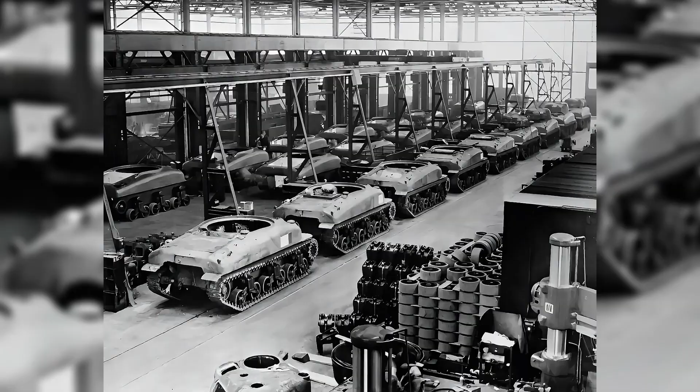What unfolded on August 17th, 1943, high above Germany? And why did it reshape the fate of World War II in ways few understood at the time, as hundreds of B-17 flying fortresses thundered toward Schweinfurt's ball-bearing factories, the sky filled with fire, loss, and sacrifice? Bombers fell, airmen were lost, and the mission carried a brutal cost. Yet, far away in Canton, Ohio, an unseen advantage was already in motion, quietly rendering this deadly gamble far less decisive than anyone imagined. Stay with us, because what America had already built would change everything.

The Schweinfurt raids. The lead bombardier peered through his Norden bomb sight as anti-aircraft flak erupted in black flowers around the formation. Below, through breaks in the industrial smoke hanging over central Bavaria, 5 factory complexes became visible. Schweinfurt. The name would become synonymous with catastrophic loss.

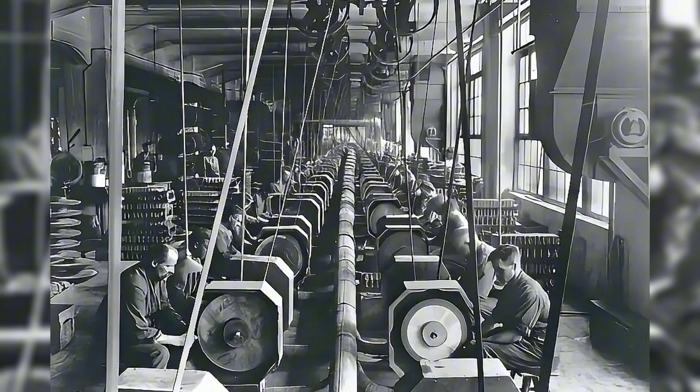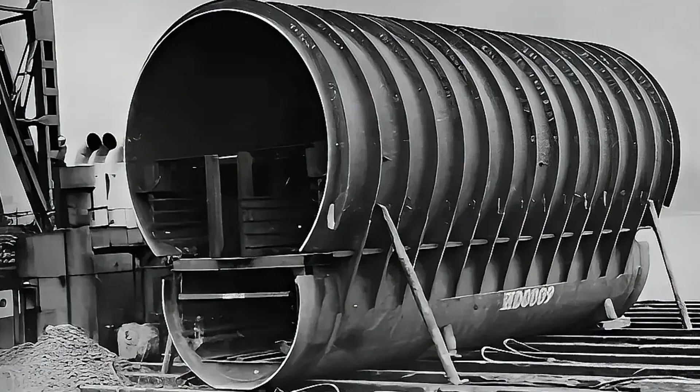Allied intelligence had identified these factories as Germany's Achilles heel. The German aviation industry alone consumed 2.4 million ball bearings monthly. Tank production, U-boat construction, truck manufacturing, all depended on these tiny precision components rolling between metal races. Destroy Schweinfurt's production capacity, military planners reasoned, and Germany's entire war machine might seize up like an engine without oil.

The statistics seemed to support the strategy. Kugelfischer Georg Schaefer, the largest complex north of the main rail yard, employed 11,700 workers even at war's end. Fichtel and Sachs operated southwest of the yard. 2 VKF factories, subsidiaries of Swedish SKF, occupied the city center and southern approaches. Together, these facilities produced approximately half of Germany's total ball-bearing output.

The bombs fell. German Me-109s and FW-190s tore into the bomber formations. B-17 gunners claimed 288 enemy aircraft destroyed. The actual Luftwaffe losses numbered between 25 and 35 fighters. American losses were catastrophic and precise. Of 230 B-17s attacking Schweinfurt, 36 were destroyed, a 15.7% loss rate.

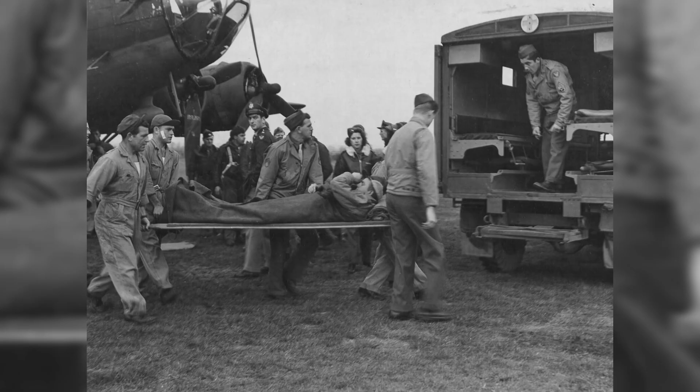Combined with simultaneous raids on Regensburg's Messerschmitt factories, 60 bombers went down that single day. The human cost was worse. Of 601 crewmen lost, 102 died. Another 381 became prisoners. The remainder evaded capture or were interned in neutral countries. Each B-17 carried 10 men. Each loss meant 10 families receiving telegrams.

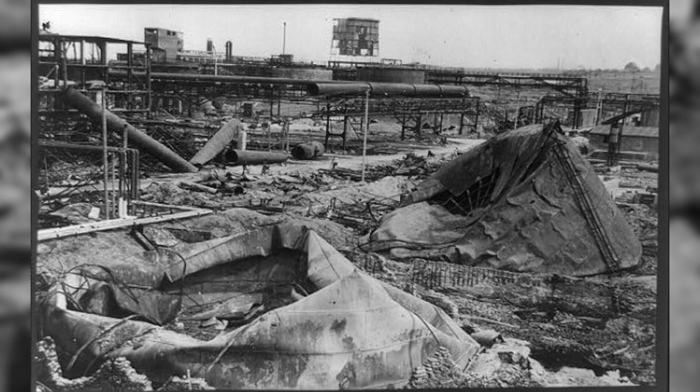The bombing worked, temporarily. German ball-bearing production collapsed from 140 tons in July to 69 tons in August, then 50 tons in September, a 64% reduction. For exactly 8 weeks, the Allies seemed to have found Germany's pressure point.

Black Thursday arrived October 14th, 1943. The second Schweinfurt raid launched 229 B-17 bombers into German airspace. This time, 60 bombers failed to return, a 26% loss rate. Total casualties reached 594 missing, 40 wounded, 5 killed.

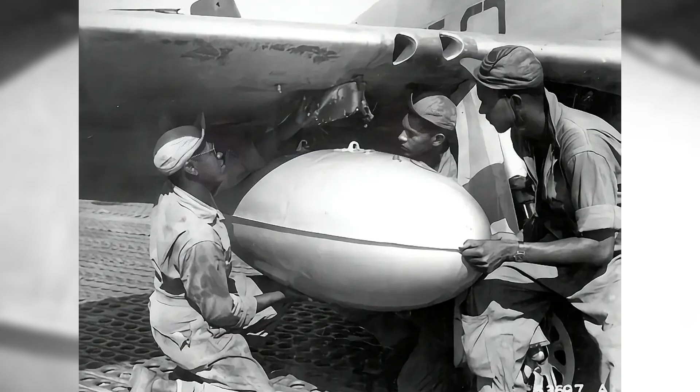Such losses were mathematically unsustainable. Crews calculated their odds. 35 missions constituted a tour. At 26% losses per mission, survival became a statistical impossibility. Deep penetration missions without long-range fighter escorts amounted to suicide runs. The raids stopped. P-51 Mustangs with drop tanks wouldn't arrive in sufficient numbers until early 1944.

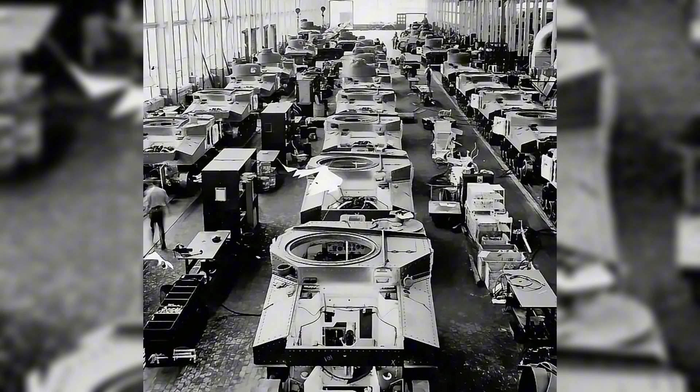Yet, despite devastating raids, German ball bearing shortages never crippled war production. 3 factors prevented collapse. First, stockpiles. German factories had accumulated enormous reserves as buffers against disruption. Months of inventory sat in warehouses.

Second, imports. Germany received ball bearings from neutral Sweden and Switzerland. Swedish SKF supplied approximately 10% of German requirements through 1943, increasing as domestic production cratered. Bearings were small, valuable, easily smuggled. British BOAC Mosquito aircraft flew dangerous missions to Sweden, returning loaded with ball bearings purchased by Allied agents. The British and Americans eventually pressured Sweden to reduce exports, even negotiating directly with SKF in April 1944, offering 88 million kronor to end German deliveries. But by then, Swedish bearings had sustained German production through critical periods.

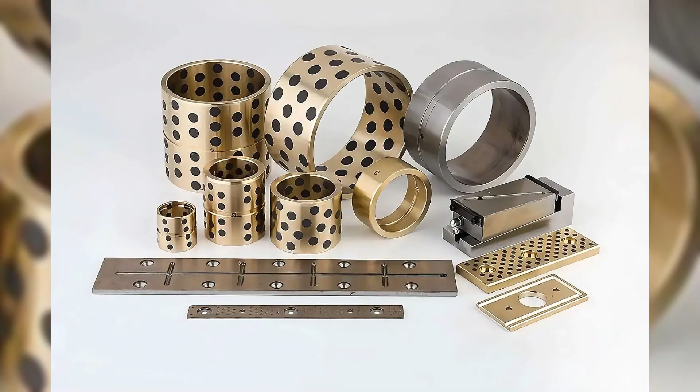Third, substitution. German engineers redesigned equipment to use plain bearings, sleeve bearings, bushings, instead of ball bearings. These required more frequent maintenance and replacement, but could be manufactured with simpler technology and less critical materials. Post-war analysis confirmed what British Air Marshal Arthur Harris had argued from the beginning. The ball-bearing campaign, despite costing hundreds of American lives and dozens of bombers, achieved limited strategic effect.

By 1945, Germany had assembled more bearing reserves than ever. Production had dispersed to underground facilities and smaller shops scattered across the Reich. While B-17s burned over Schweinfurt, American factories were solving the bearing problem differently.

But what if the real victory wasn't won in the skies over Bavaria at all? What if it had been secured 45 years earlier in a St. Louis carriage shop? The friction problem and Henry Timken's origins.

Friction transforms kinetic energy into heat while damaging surfaces and wasting energy. It represents a fundamental problem in all mechanical motion. Every wheel that turns, every axle that rotates, every machine that operates fights this invisible enemy. The man who could reduce friction fundamentally would achieve something of real value to the world. Henry Timken believed this absolutely.

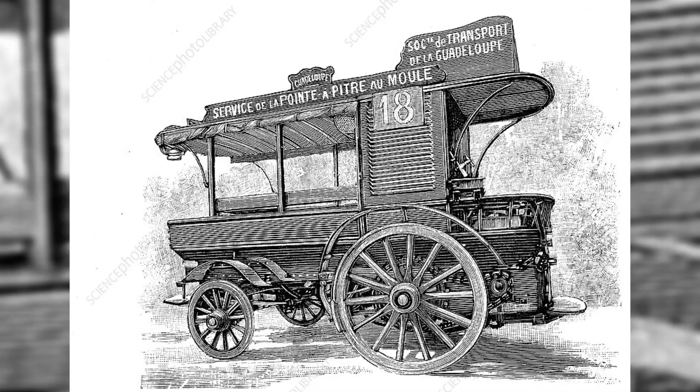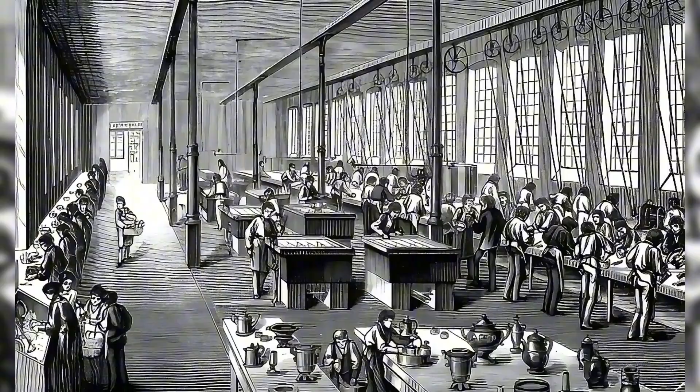August 16, 1831, Tarmstedt, Kingdom of Hanover. Henry Timken entered a world where transportation meant horses, wagons, and carriages. Prussia dominated German engineering, and the Industrial Revolution was gathering momentum across Europe. Young Henry would see none of it firsthand for long.

At age 7, Timken immigrated to the United States with his family. They settled in Missouri, a frontier state where practical skills mattered more than formal education. The boy who might have become a German engineer became an American craftsman instead.

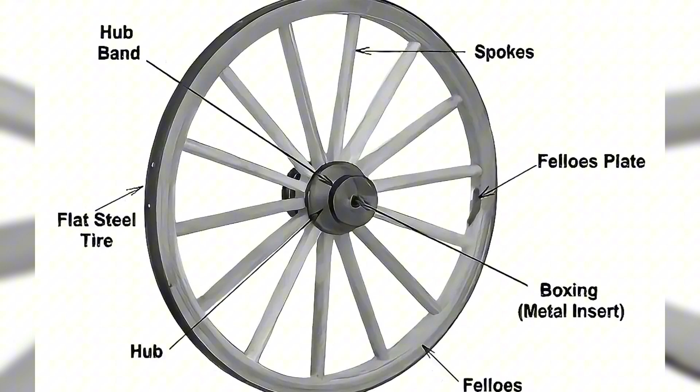As a teenager, Timken apprenticed to a leading carriage and wagon maker. He learned wood selection, joint construction, wheel building, spring mounting. He discovered how carriages failed: axles wore, wheels wobbled, bearings seized. The friction problem revealed itself in broken vehicles and dissatisfied customers.

By age 24, Timken had established his own carriage factory in St. Louis. He built his reputation on quality and innovation. Customers wanted vehicles that lasted, and Timken wanted to give them something better than what everyone else offered.

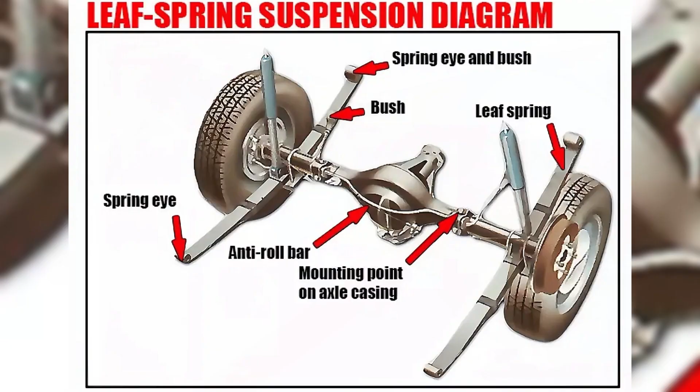In 1877, Timken received a patent for the Timken buggy spring. The innovation sounds trivial now, a spring design for carriages, but the spring's performance made it widely adopted throughout America. Numerous companies produced it on a royalty basis.

The patent made Timken well known nationally. His carriage business flourished, and the spring's success provided financial security. More importantly, it demonstrated that small mechanical improvements could create substantial competitive advantages. Timken had learned a crucial lesson: solve a real problem better than anyone else, and the market responds.

Around 1895, Timken took interest in problems created by friction in wagon design. He was 64 years old. Most men that age were contemplating retirement. Timken was contemplating revolution. Conventional bearings of the 19th century worked adequately for reducing friction under vertical loads.

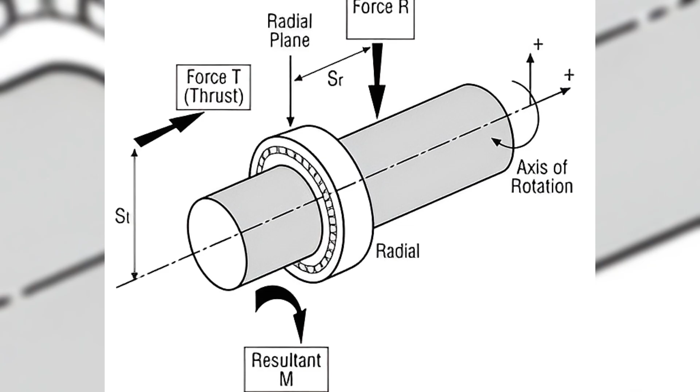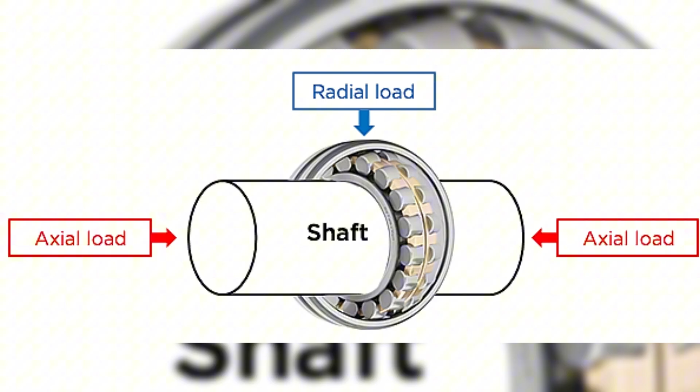A wagon sitting still, or rolling straight forward on level ground, presented simple engineering challenges, and existing bearing designs handled these conditions acceptably. Problems emerged when wheels had to bear heavy loads from the sides. Vehicles turning corners generated forces parallel to the axle. Wheels hitting ruts or rocks experienced sudden thrust loads parallel to the axle. Combined loading conditions, radial and thrust loads simultaneously, destroyed conventional bearings rapidly.

Ball bearings represented the most common anti-friction bearing of the era. Their design was elegant: spherical balls rolled between an inner and outer race, reducing friction through rolling contact instead of sliding contact. They worked excellently for light loads and high speeds, machine tools, bicycles, light machinery, ball bearings excelled in these applications.

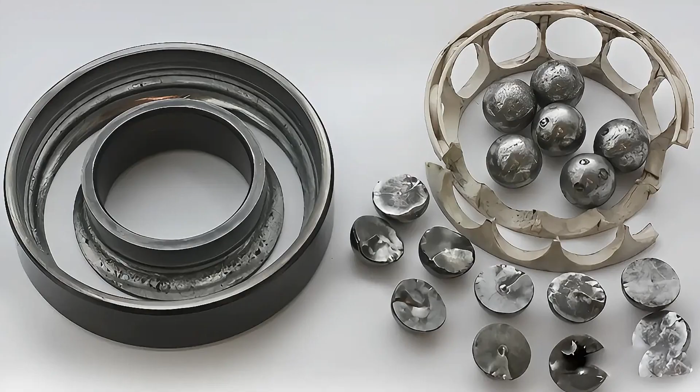But ball bearings had limitations. When subjected to heavy radial loads and thrust loads simultaneously, exactly what wagon wheels experienced when turning while carrying weight, ball bearings wore quickly. The contact point between ball and race was geometrically tiny. All load concentrated at these points. Stress levels became enormous. Metal deformed.

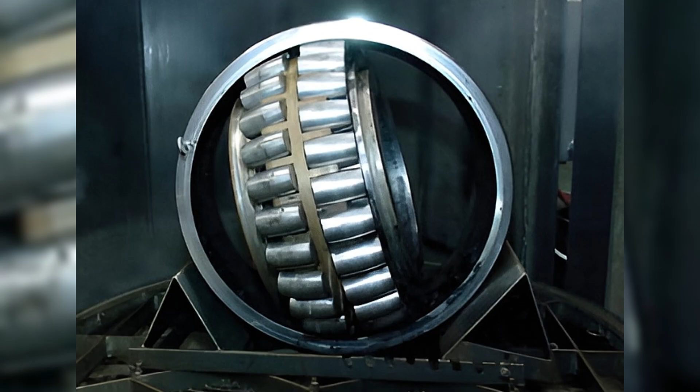Bearings failed. Timken studied the problem with help from his two sons and a nephew. They weren't trained engineers in the European sense. They were practical men who built things, tested them, and observed what worked. The family began experiments to make a better bearing. The solution they developed would change everything.

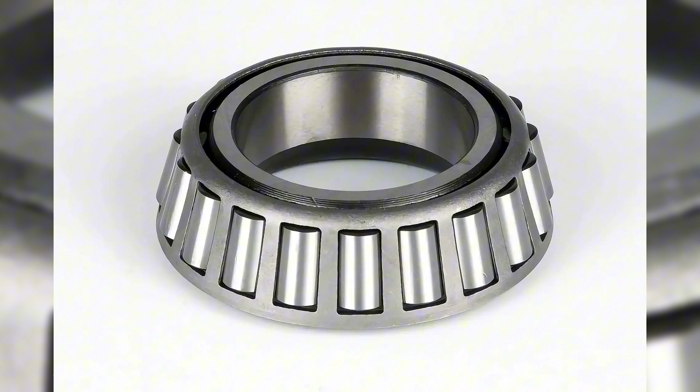So what radical design could possibly outperform a technology that Germany's finest engineers had spent decades perfecting?

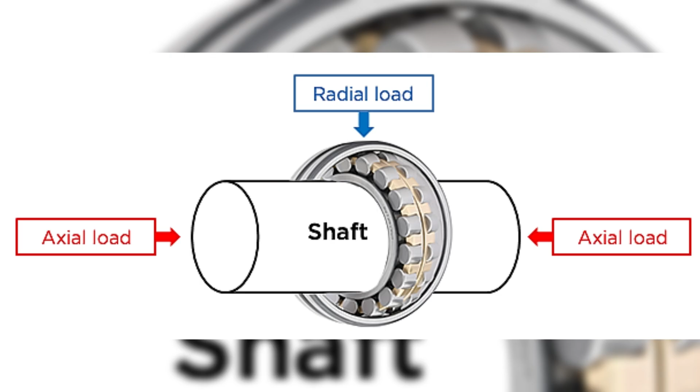Inventing the tapered roller bearing, the concept was revolutionary precisely because it abandoned spheres entirely. Instead of balls, use tapered rollers. Instead of flat races, use cone-shaped races. Instead of simple circular geometry, embrace angular complexity. The rollers would be cone-shaped, arranged at an angle between cone-shaped races. This geometry would allow the bearing to handle both radial loads, perpendicular to the shaft, and thrust loads, forces parallel to the shaft, simultaneously, exactly what vehicle wheels needed, exactly what ball bearings couldn't provide efficiently.

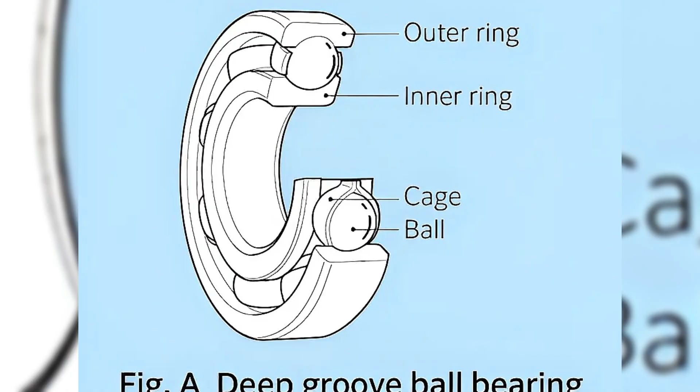May 1st, 1898, Henry Timken received two patents for his tapered roller bearing design. The innovation was profound in ways that wouldn't become fully apparent for decades.

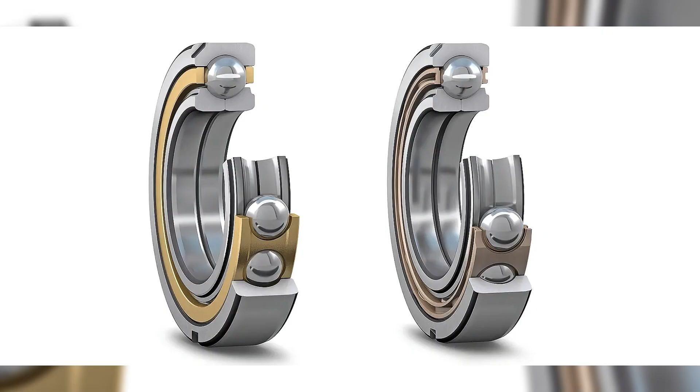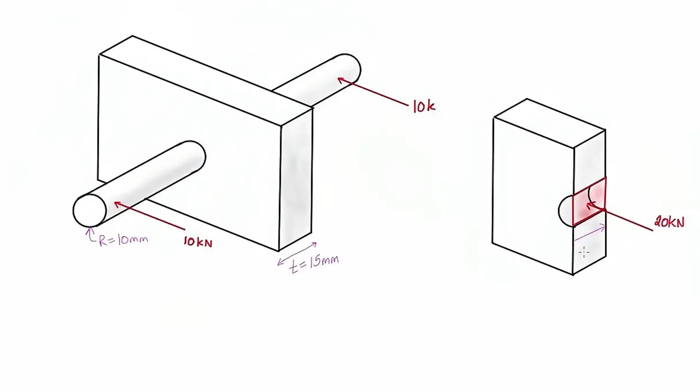The physics were elegant. A ball bearing contacts its race at a point. Under load, this point deforms into a small ellipse, but contact area remains tiny. Stress concentrates intensely at these microscopic contact zones. Increase the load, and the stress increases proportionally. Eventually, the metal yields, the bearing fails.

A tapered roller contacts its race along a line. Under load, this line deforms into a narrow rectangle. Contact area is much larger.

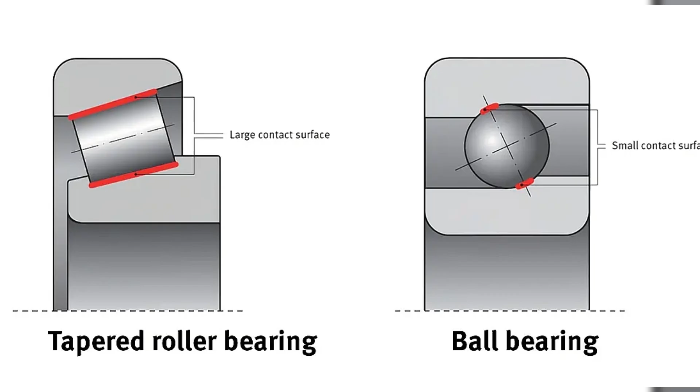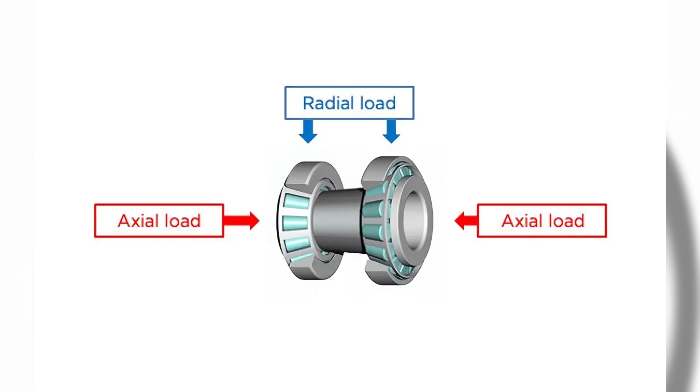Stress distributes over greater surface area, reducing peak stress at any single point. The same load that would destroy a ball bearing becomes manageable for a tapered roller bearing.

Load distribution followed different principles. In ball bearings under combined loads, only a few balls carried most of the load. The geometry meant that balls in certain positions bore disproportionate stress, while others contributed minimally. In tapered roller bearings, all rollers shared loads more evenly due to the cone geometry and precise positioning.

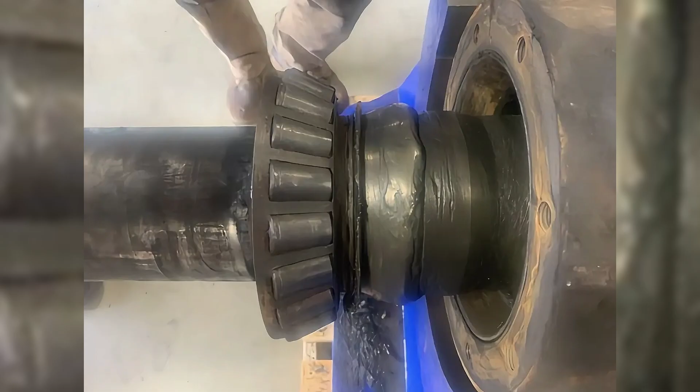The design offered another advantage ball bearings couldn't match: adjustability. Tapered roller bearings could be preloaded, adjusted to eliminate clearance and optimize contact. Mechanics could compensate for wear by tightening the bearing. Ball bearings had fixed clearances determined during manufacturing. Once worn, they required replacement.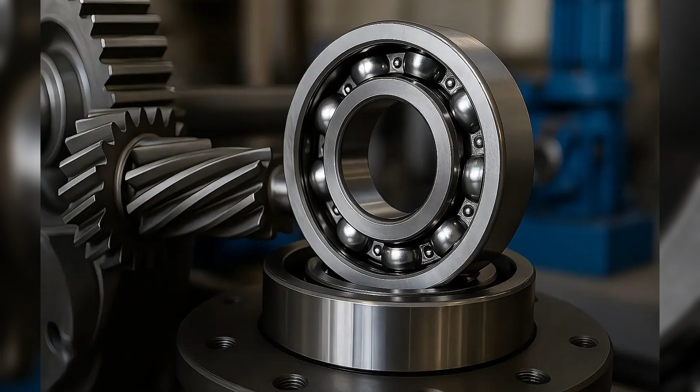Heat dissipation mattered for continuous operation. The larger contact area in roller bearings conducted heat away more effectively, reducing operating temperatures. Cooler bearings lasted longer. They maintained tighter tolerances and performed more predictably. Timken's bearing could handle 5 times the load of an equivalent ball bearing while maintaining lower friction and longer life. Five times. The improvement wasn't marginal. It was transformative.

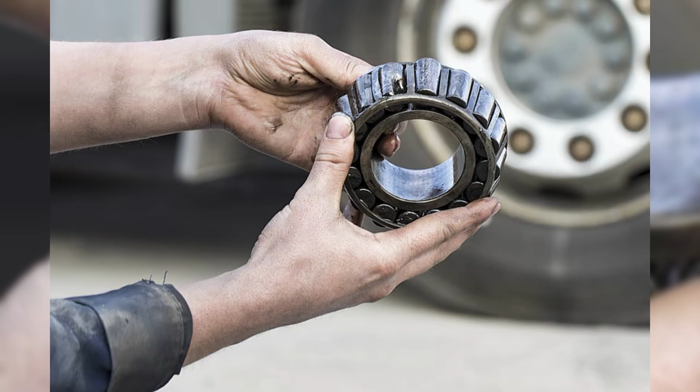In 1899, Timken incorporated the Timken Roller Bearing Axle Company in a corner of his St. Louis carriage factory. The name told the story: roller bearings for axles. The application was specific. The company grew so quickly that in 1901, Timken made a strategic decision. He relocated to Canton, Ohio.

The reasoning was sound. The emerging automotive industry centered in Detroit and Cleveland. Steelmaking concentrated in Pittsburgh and Cleveland. Canton sat within easy reach of both. Proximity to customers and suppliers would matter.

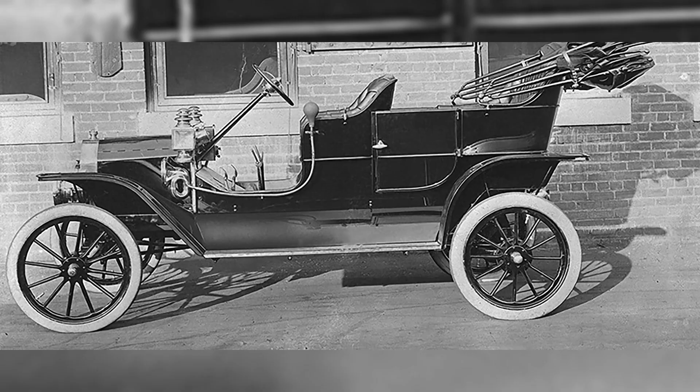The move positioned Timken perfectly for the automotive revolution. Henry Ford introduced the Model T in 1908. Automobile production exploded. Every car needed bearings, wheels, transmissions, differentials, steering assemblies. Timken bearings could handle automotive loads better than ball bearings. The market was enormous and growing exponentially.

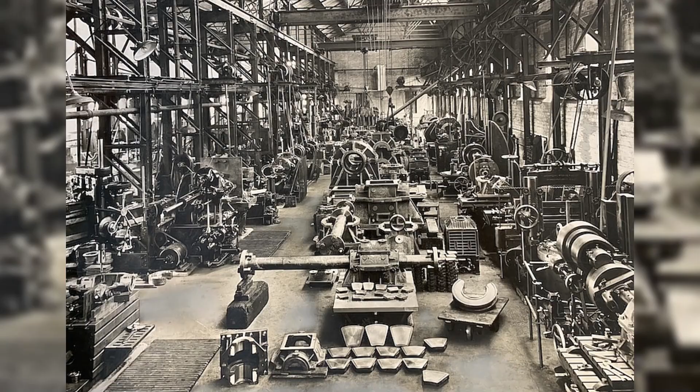But while Timken developed roller bearings in America, across the Atlantic, Germany was building a different kind of dominance. A dominance based on balls, not rollers. A dominance built on precision manufacturing and global distribution. A dominance that would become a strategic weapon.

The question wasn't whether Timken's design was superior for heavy loads. The physics proved that conclusively. The question was whether an American company with a superior design could compete against German manufacturers with established markets, advanced metallurgy, and decades of experience. How had Germany come to dominate global bearing production so completely that America would enter World War I dependent on enemy technology? German dominance versus American innovation.

In 1883, German entrepreneur Friedrich Fischer and his son pioneered mass production of precision steel balls in Schweinfurt using a grinding machine. The invention seems simple in retrospect. A machine that could grind steel balls to precise spherical tolerances, consistently, repeatedly, economically. But precision ball production had eluded manufacturers for decades.

Fischer's factory merged with Georg Schaefer's shop to become Kugelfischer Georg Schaefer in 1909. The company name would appear in Allied bombing reports 34 years later. But in 1909, it represented the cutting edge of precision manufacturing.

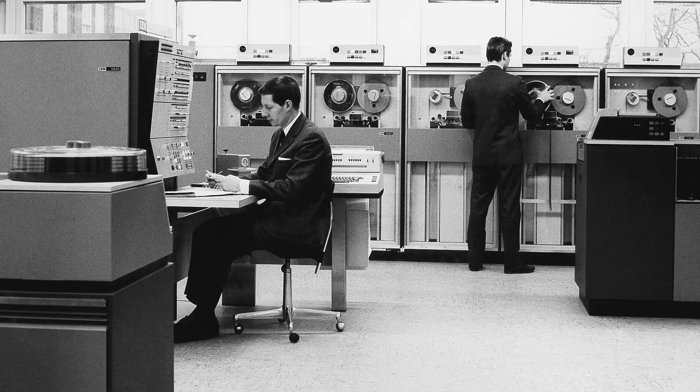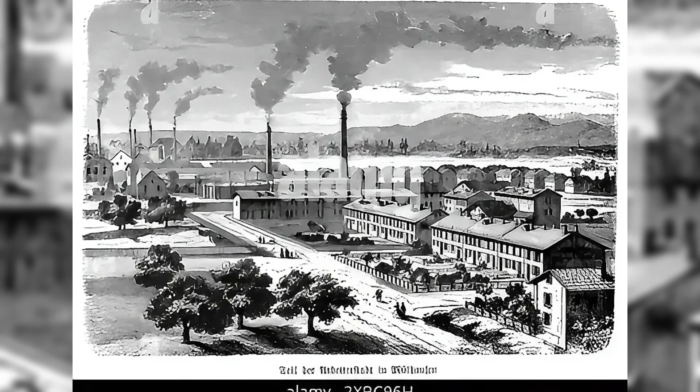SKF rapidly expanded globally with aggressive strategy. By 1908, SKF operated branch offices in Germany and France. By 1909, subsidiaries existed in New York, Britain, Denmark, Norway, Belgium, Holland, and Russia. This wasn't gradual expansion. This was blitzkrieg capitalism. Within 2 years of founding, SKF had established itself across 3 continents.

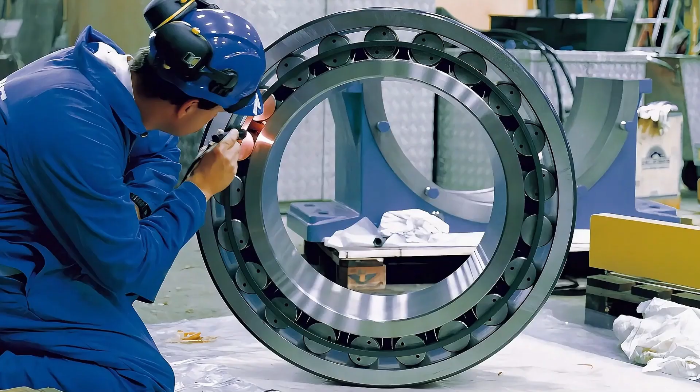SKF became the world's largest bearing manufacturer through relentless expansion and strategic positioning. They understood markets. They understood distribution. They understood that controlling supply chains created competitive moats.

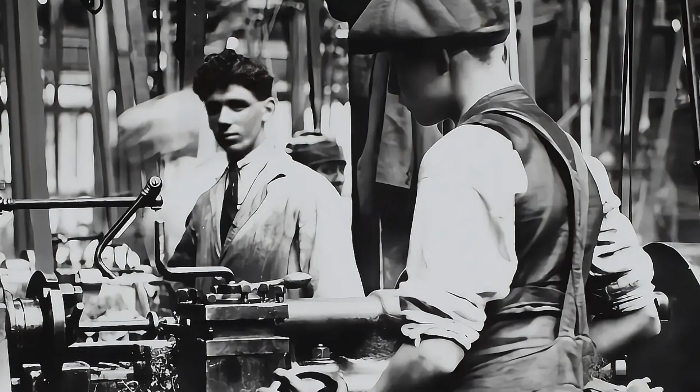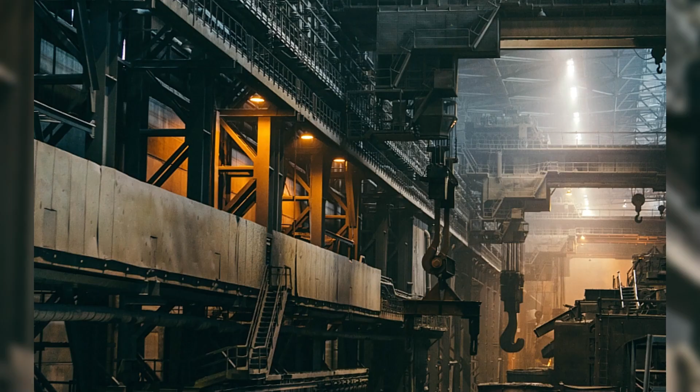Before World War I, most ball bearings used in America were imported from Germany. American manufacturers purchased German bearings because German bearings were superior. German companies had established dominant positions through superior metallurgy, precision manufacturing, and aggressive global expansion. German metallurgists understood steel composition at atomic levels. Carbon content, grain structure, heat treatment protocols, these weren't mysteries to German engineers. They were sciences. German bearing steel outperformed American bearing steel because Germans had invested decades in materials research.

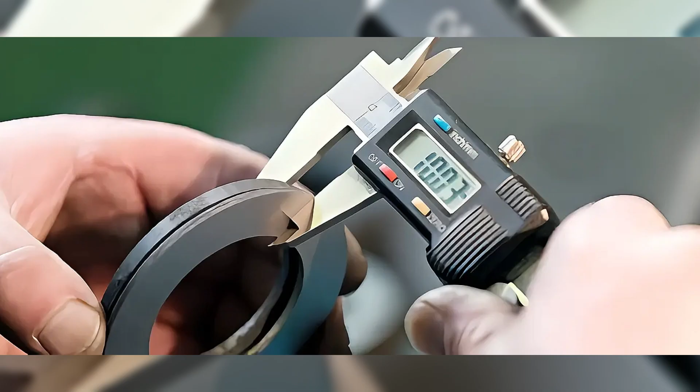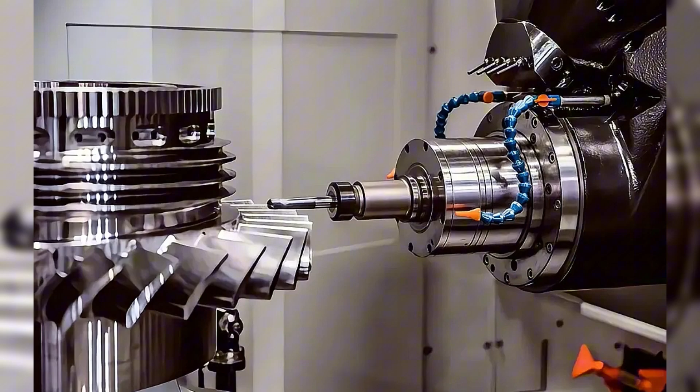Precision manufacturing favored German firms. Tolerances measured in microns. Surface finishes measured in micro-inches. German machine tools cut more accurately. German measurement systems verified more precisely. German quality control rejected more ruthlessly. Henry Timken's travels to Germany in 1892 and 1895 provided competitive intelligence that proved valuable.

He observed Daimler and Benz's internal combustion engine technology. He witnessed advanced bearing development. He understood viscerally that Europe was years ahead of America in bearing production.

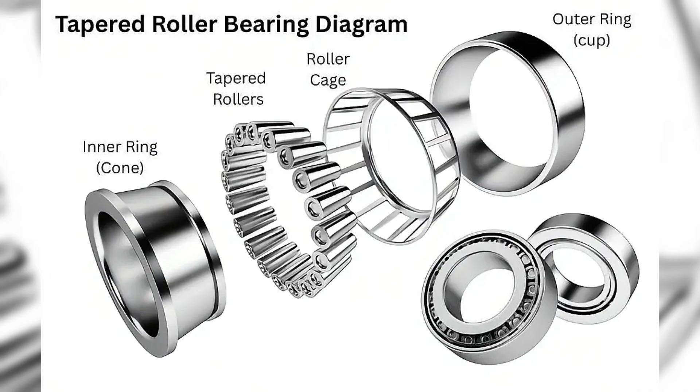But Timken saw something German engineers missed. He recognized that ball bearings, despite German excellence in manufacturing them, had fundamental limitations for heavy load applications. Geometry constrained performance. No amount of precision manufacturing could overcome point contact physics. Timken's tapered roller design offered advantages that German ball bearings couldn't match, regardless of manufacturing quality. For heavy load applications—trucks, railroad cars, industrial machinery—tapered rollers vastly outperformed ball bearings. The geometry distributed loads across a line of contact rather than a point, dramatically increasing load capacity.

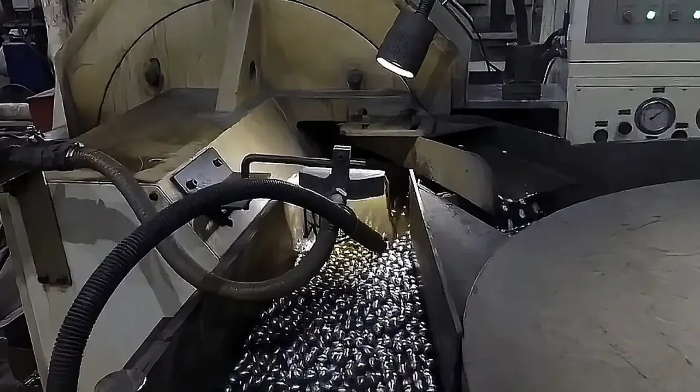When World War I began in August 1914, Germany's ball bearing monopoly became a strategic weapon. The British blockade cut German exports immediately. American industry, dependent on German bearings, faced shortages. Prices spiked. Delivery times extended. Production schedules slipped. American manufacturers found themselves unable to quickly substitute ball bearings because precision ball production required specialized machinery and expertise concentrated in Germany. You couldn't just decide to manufacture precision ball bearings. You needed grinding machines, measuring equipment, metallurgical knowledge, trained workers. The infrastructure didn't exist in America.

The Timken Company, however, already had production capacity for tapered rollers—a different technology, a different manufacturing process, a technology that worked better for many applications anyway. World War I demonstrated that tapered roller bearings could replace ball bearings in most military vehicles. Timken bearings equipped trucks, artillery carriages, and heavy equipment. Performance proved excellent. Reliability exceeded expectations. Military procurement officers took notice. The war exposed German bearing dominance as both an economic advantage and a strategic vulnerability. America learned a hard lesson about supply chain dependencies. Would one man's vision and one company's production capacity be enough when the world needed bearings by the millions?

Building the Timken Empire, 1920 to 1940.

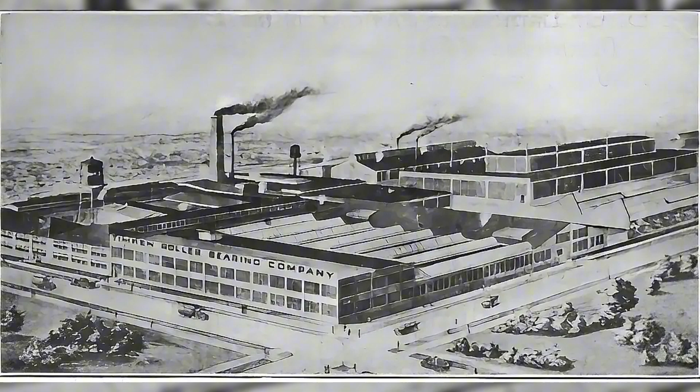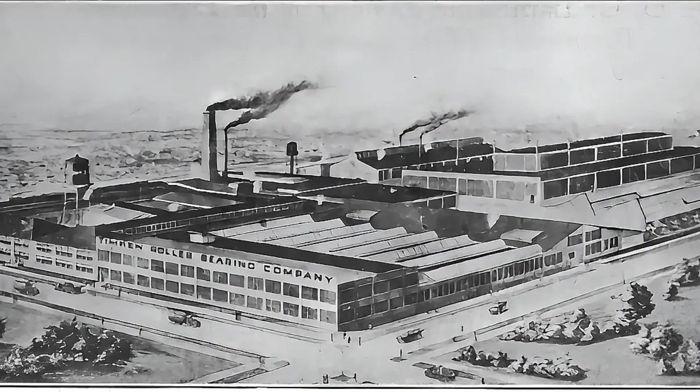By 1920, the Timken Company was making 90% of America's tapered roller bearings. The statistic represented near total market dominance in a specific technology. Timken didn't compete with German ball bearing manufacturers on their terms. Timken had created a separate category and owned it completely. The company operated bearing plants in Columbus, Ohio, opened in 1920, and Canada in 1922. These facilities would eventually expand globally, but the initial focus remained North America, where demand was exploding.

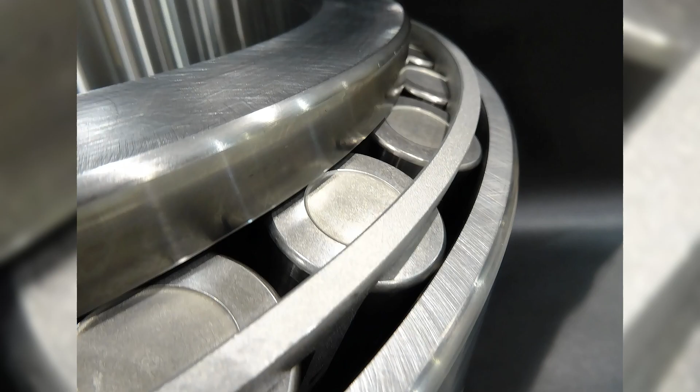Railroad adoption proved crucial for establishing credibility. In 1923, Timken bearings were tested on streetcars running between Canton and Cleveland. The route provided perfect testing conditions: frequent stops, heavy loads, constant operation. The bearings performed flawlessly. Testing expanded to Wheeling and Lake Erie Railroad boxcars. Freight cars represented brutal applications—heavy loads, shock impacts, minimal maintenance, contaminated environments. Boxcars sat in rail yards for weeks, accumulating dirt and moisture, then hauled 60-ton loads across rough track. Bearings either survived or failed spectacularly.

Timken bearings survived. By 1926, the Chicago, Milwaukee, St. Paul, and Pacific Railroad ordered Timken bearings for high-speed trains. The Burlington Zephyr and Santa Fe Super Chief represented the pinnacle of American passenger rail. These weren't freight applications. These were showcase trains where reliability mattered absolutely. Railroad companies bet their reputations on Timken bearings.

But Henry Timken never saw this success. He died March 16, 1909, in San Diego, California, before his invention's full impact became apparent. He was 77 years old. His sons, H.H. Timken and W.R. Timken, continued building the company according to principles their father established.

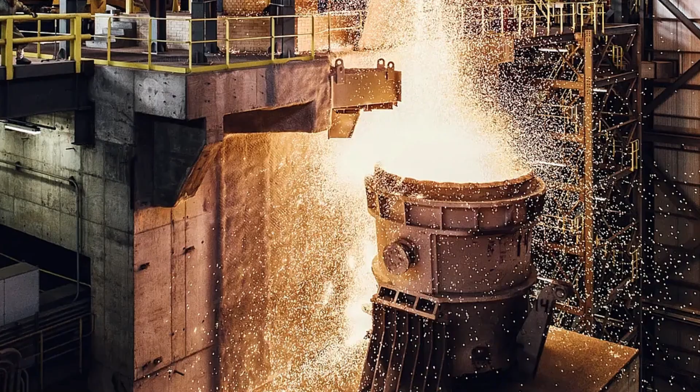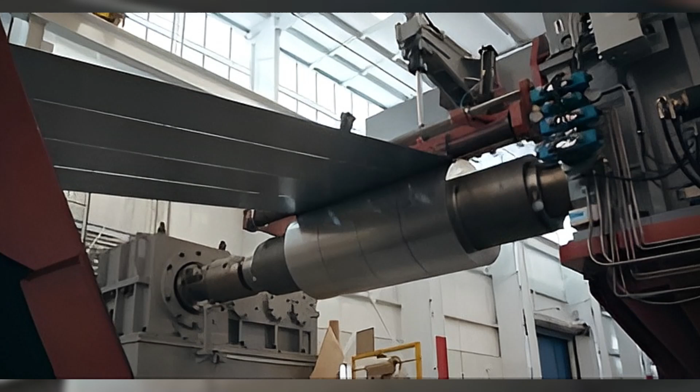In 1917, facing World War I steel shortages, Timken made a decision that would prove critical for decades. The company began steel and tube-making operations in Canton to vertically integrate and control bearing steel quality. The decision seemed expensive and risky. Steel production required blast furnaces, rolling mills, enormous capital investment. Most bearing manufacturers purchased steel from suppliers. Why manufacture steel when steel companies existed?

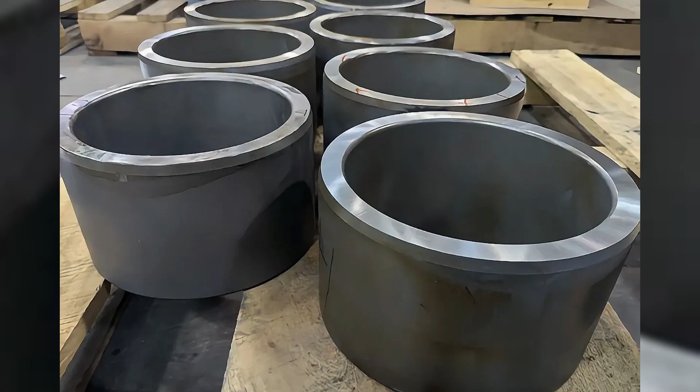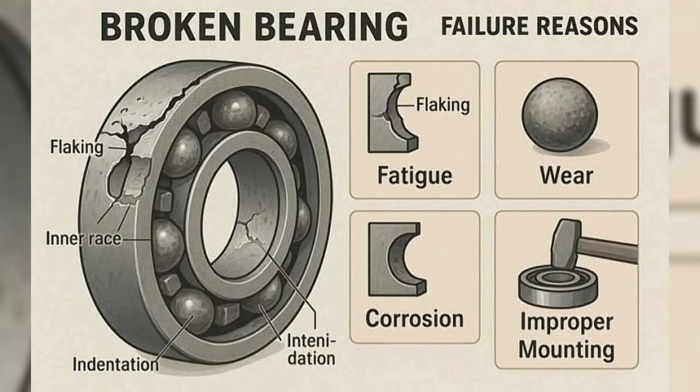Because making your own steel meant controlling composition, heat treatment, and quality at every step. Bearing steel requires precise carbon content, uniform grain structure, and freedom from inclusions. Microscopic imperfections cause bearing failures. Inconsistent metallurgy produces inconsistent bearings. By producing steel internally, Timken ensured bearing quality while protecting against supply disruptions. Wars disrupted steel supplies. Economic downturns affected steel availability. Vertical integration provided security.

The company entered the Great Depression in a strong financial position. Its performance placed it among the most solid, well-managed industrial firms of the 1930s. While competitors struggled, Timken diversified, expanding into non-automotive markets—agriculture, machine tooling, industrial equipment, and rail—which softened the depression's impacts. Farmers still needed tractors. Factories still needed machinery. Railroads still hauled freight. Diversification provided stability.

During the early 1930s, Timken developed bearings for propeller drive shafts, expanding into shipbuilding. U.S. Navy contracts followed. Naval applications demanded reliability. Ships operated far from repair facilities, and bearing failures at sea created dangerous situations. The Navy needed bearings that worked.

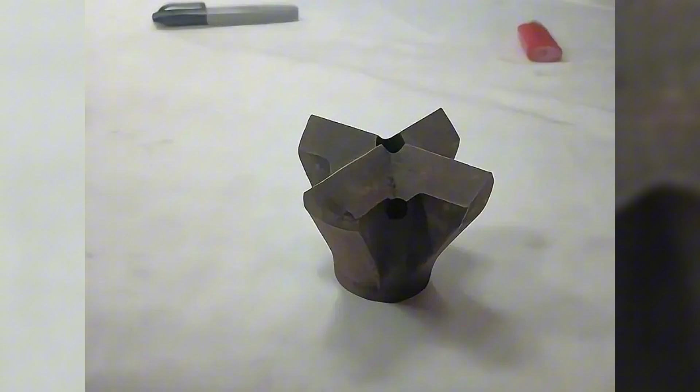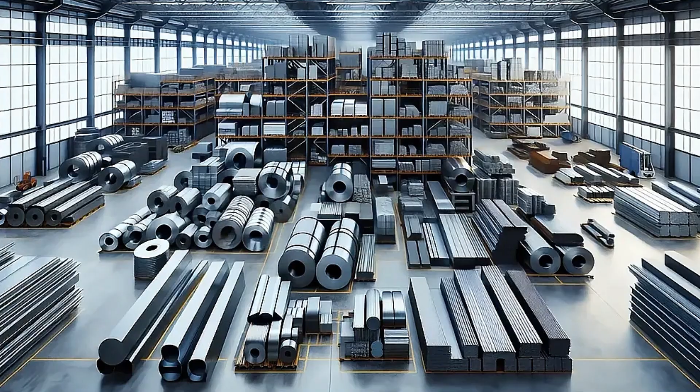In 1932, Timken began manufacturing removable rock bits for construction and mining equipment. The product line seemed unrelated to bearings, but rock bits provided outlets for steel production during depressed markets. Vertical integration meant Timken could manufacture various steel products when bearing demand slumped.

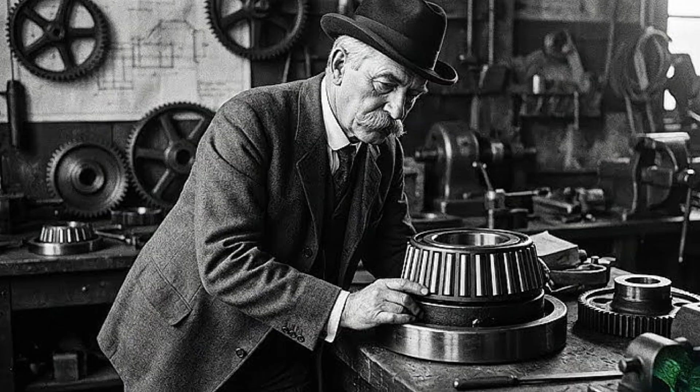When H. Timken died in 1940, his son, H. Timken Jr., became chairman. The company operated manufacturing facilities in Canton, Columbus, Mount Vernon in Ohio, plus Canada, Britain, France, and South Africa. Timken employed thousands and produced bearings for virtually every industry. The company had evolved from a corner of a St. Louis carriage factory to a global industrial enterprise.

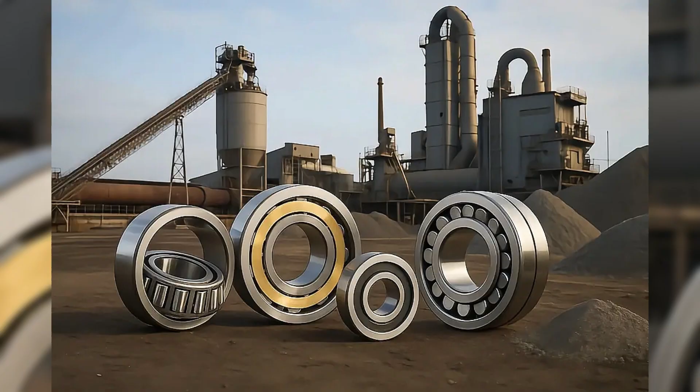Production capacity existed. Distribution networks functioned. Product quality was established. Management succession had occurred smoothly. Then war came to Europe again. This time, America would enter the conflict with bearing production capacity that Germany couldn't bomb, couldn't blockade, and couldn't match. Could factories in Ohio really outproduce the entire German industrial machine when the world's largest mechanized war demanded bearings by the hundreds of millions? The bearing war within World War II.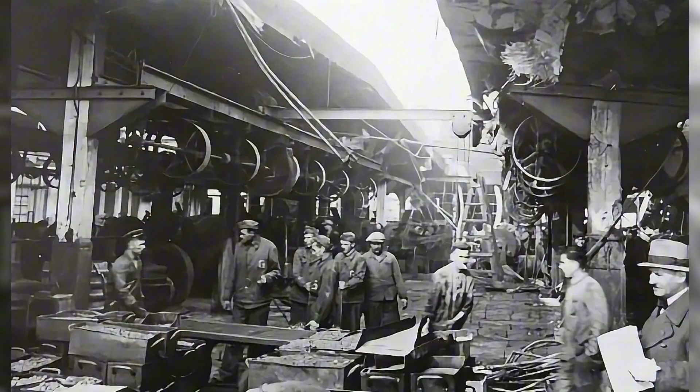By 1943, Allied intelligence identified ball bearings as a critical German vulnerability. Albert Speer, German armaments minister, stated, as early as September 20th, 1942, I had warned Hitler that the tank production at Friedrichshafen and the ball bearing facilities in Schweinfurt were crucial to our whole effort. Speer understood industrial warfare. Modern mechanized combat consumed bearings voraciously. Every tank used dozens. Every aircraft required hundreds. Every truck needed scores. Multiply by hundreds of thousands of vehicles, and bearing requirements became astronomical.

When World War II began, Timken's production increased dramatically. The company opened several new Ohio facilities to meet military demand. Timken Ordnance Company in Canton, established 1941, built approximately 80,000 gun tubes over the next 2 years. The Zanesville bearing plant opened in 1943. Other locations included Columbus and Newton Falls. During the war, Timken's output more than doubled its previous peak.

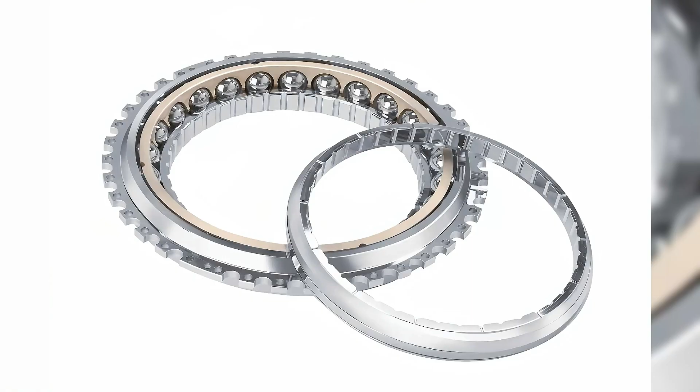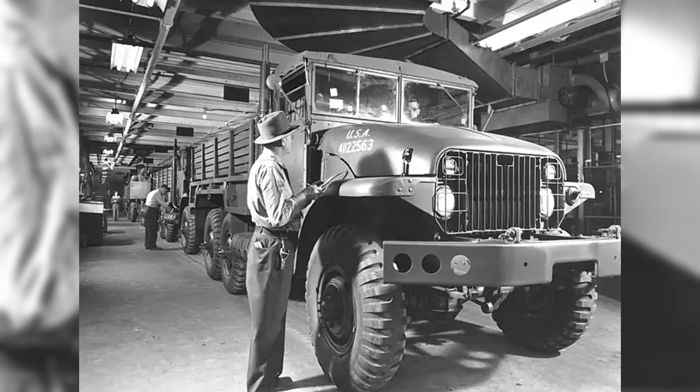The statistics tell the story with brutal clarity. Every U.S. Jeep used 24 Timken bearings. With 660,000 Jeeps delivered to the military, Timken produced over 15.8 million bearings for Jeeps alone. Just Jeeps. Just one vehicle type. Trucks required dozens more bearings each. The standard 2.5-ton truck needed bearings in wheels, transmission, differential, transfer case, drive shaft. Multiply by hundreds of thousands of trucks, and the numbers become staggering.

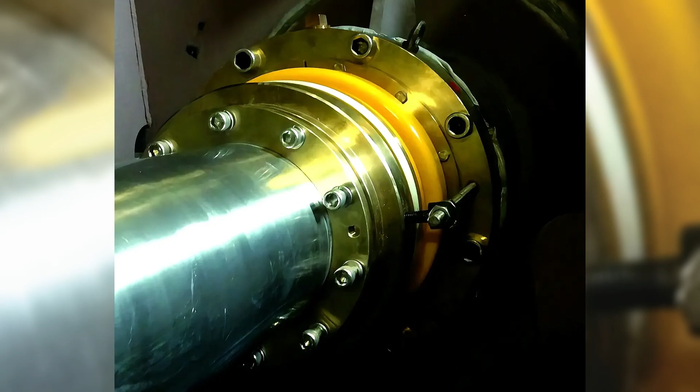Tanks used Timken bearings in tracks, wheels, turrets, and transmissions. Sherman tanks, Grant tanks, Stuart light tanks, every American armored vehicle rolled on Timken bearings. Artillery pieces used them in traversing mechanisms and recoil systems. Aircraft landing gear depended on them. Ship propeller shafts required massive custom bearings.

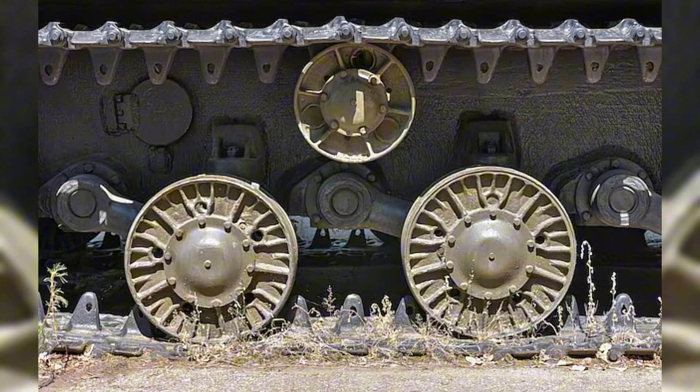The advantage wasn't just that Timken bearings worked. They often worked better than ball bearings for military applications. Load capacity mattered most. Tapered rollers handled combined radial and thrust loads far better than ball bearings. Tank tracks and truck wheels experienced exactly these combined loads constantly. A tank track roller supports vertical load from the vehicle's weight while simultaneously experiencing lateral loads from steering and thrust loads from acceleration. Ball bearings struggle with combined loading. Tapered rollers excel at it.

Durability became critical in combat conditions. Line contact between roller and race versus point contact in ball bearings distributed loads, reducing stress and extending life. Military vehicles operated under conditions that destroyed civilian equipment. Overloading, shock impacts, poor maintenance, contaminated lubrication, extreme temperatures, combat created the worst possible bearing environments.

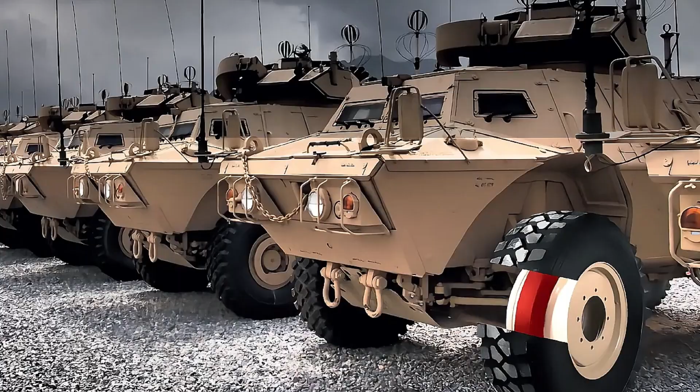Maintenance considerations favored tapered rollers. Tapered roller bearings could be adjusted to compensate for wear. Field mechanics could tighten bearings as they wore, extending service life. Ball bearings, once worn, had to be replaced. In combat zones, replacement meant downtime. Downtime meant vulnerability. Manufacturing advantages proved decisive.

Timken controlled its entire supply chain from steel production through bearing assembly. No dependence on imports. No reliance on external suppliers. No vulnerability to submarine warfare or blockades. German engineers knew tapered rollers existed. The technology wasn't secret, but German bearing manufacturing was concentrated in ball bearings. Converting production would require retooling entire factories, retraining thousands of workers, and redesigning millions of pieces of equipment. Impossible during wartime when every factory operated at maximum capacity producing existing designs.

By war's end, Timken had produced hundreds of millions of bearings for Allied military equipment. The company's vertically integrated model, making steel, machining bearings, and controlling quality end-to-end, proved superior to relying on global supply chains that wars disrupted.

Albert Speer later admitted that if the Allies had concentrated on bombing ball bearings, two months later it would weaken war production fundamentally, and four months later, war production would stop completely. But the admission was theoretical.

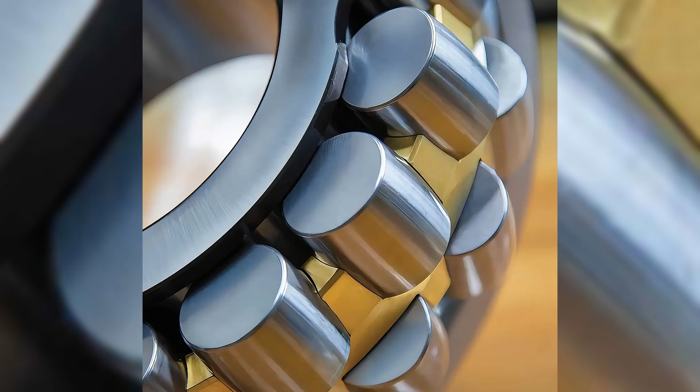Post-war legacy to present day: Following World War II, much machinery shipped to Europe under the Marshall Plan was equipped with Timken bearings. American economic assistance rebuilt European infrastructure, and American bearings helped the machinery function. The company established broader presence in markets where European competitors had previously dominated.

The antitrust case that haunted the company came to a head post-war. United States versus Timken Roller Bearing Company alleged Timken conspired with British Timken Limited and French Timken to restrain trade through territorial restrictions during the war. These restrictions created problems.

Australia, in British Timken's territory, desperately needed bearings for war production. British Timken couldn't supply adequate quantities; they were overwhelmed meeting UK military needs. Australian distributors clamored for American Timken bearings, but territorial agreements prevented direct supply.

December 4th, 1940. Correspondence between Timken executives showed the dilemma: 'We were advised by the British Purchasing Commission that they will very likely take over all purchases of anti-friction bearings for Australia.' Internal memos documented how territorial agreements interfered with wartime production.

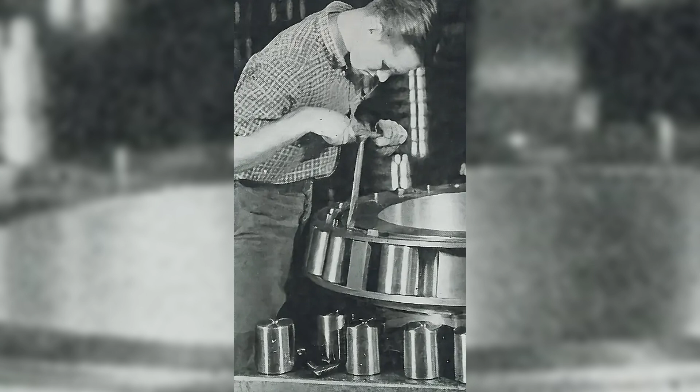In 1974, Timken opened sales operations in Japan, bringing American tapered roller bearings to compete in the world's most demanding bearing market. Japanese manufacturers were legendary for quality standards and precision manufacturing. Timken competed successfully. Throughout the 1970s and 1980s, Timken expanded into Italy, Korea, Singapore, and Venezuela. The global footprint grew systematically.

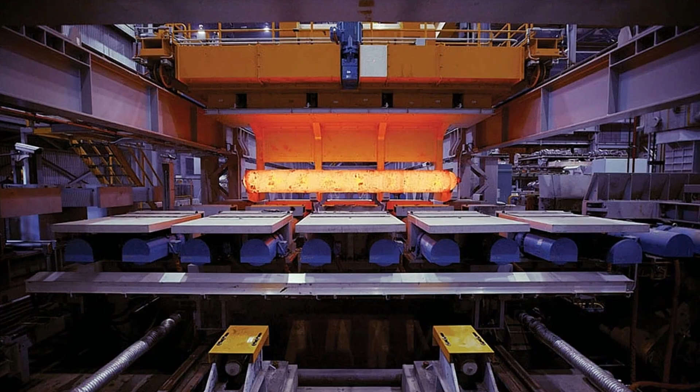In 2003, Timken acquired competitor Torrington Company for $840 million, doubling company size and creating the world's third largest bearing manufacturer. In 2014, the company separated bearing and steel operations. Timken Company continued manufacturing bearings, while Timken Steel, now Metallus, became independent. The vertical integration strategy that began in 1917 ended nearly a century later.

As of 2024, Timken Company posted $4.6 billion in sales and employs more than 19,000 people globally, operating from 45 countries. The company remains the world's largest manufacturer of tapered roller bearings, a position held continuously since the 1920s.

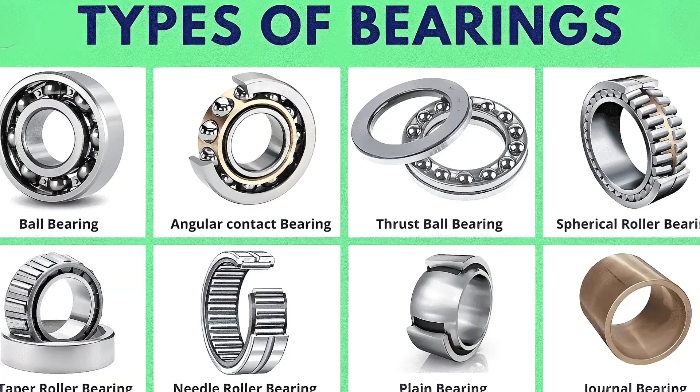The product line has expanded dramatically. Timken now manufactures ball bearings, spherical bearings, cylindrical bearings, thrust bearings, plain bearings, housed units, and precision bearings. The company produces gear drives, automated lubrication systems, belts, chain, couplings, linear motion products, and power transmission services. But tapered roller bearings remain central.

From bearings the size used in disk drives to 9-ton custom bearings made for heavy forges, Timken dominates the market with approximately 30% global market share in tapered rollers.

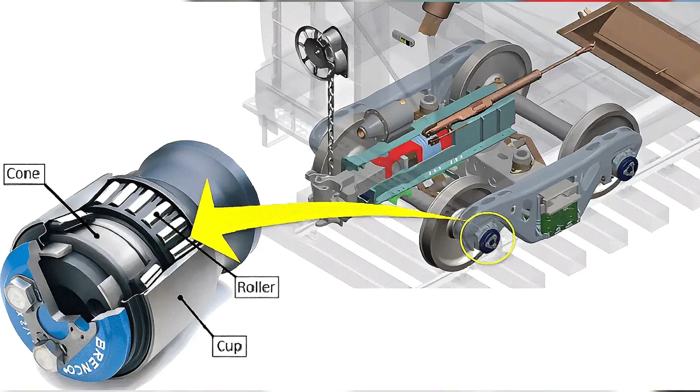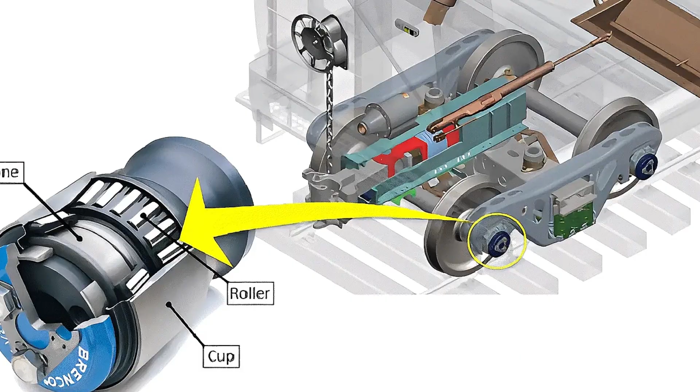Modern bearing technology vindicated Henry Timken's 1898 innovation. Today's heavy equipment overwhelmingly uses tapered roller bearings: automotive wheel bearings in trucks, SUVs, and heavy-duty vehicles, aerospace landing gear and gearbox applications, rail freight car axles and locomotive drives, industrial wind turbines, mining equipment, steel mills, construction excavators, cranes, heavy machinery. Ball bearings are best for high-speed, light-load uses, while tapered roller bearings dominate heavy-duty applications with compound loads.

The core physics Henry Timken developed in 1898 still apply today. Line contact spreads loads more effectively. Tapered shapes handle both radial and axial forces, and adjustability allows better performance under changing conditions. These simple principles became the foundation of a global industry.

The ultimate irony remains: Henry Timken was German. Born in Bremen, he emigrated at age 7 and became thoroughly American. His engineering sensibility reflected German thoroughness and precision, but he saw what established German manufacturers missed.